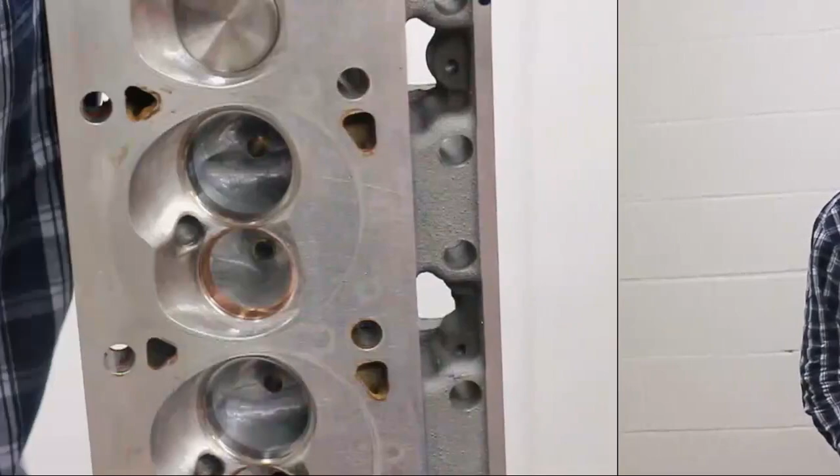The first thing that we did was put in beryllium exhaust valve seats here, right? You can probably see that they are a little different color to the normal seats. Secondly, whilst putting in the valve seats, we enlarged them to a 1.72 diameter.

The stock intake valve on these heads comes at a 194. So there was room to put in this larger valve. So instead of the normal 202/16 or 205/16, what we had was a 194 and a 172. So you can see we've sacrificed some intake valve size for exhaust valve size.

Here's how the intake and exhaust valves look when installed. As you can see, it doesn't look that much different to stock. It's not until you put a virtually stock-sized valve head up against it that you can see the difference.

By the way, this is a Dart casting here, and you'll be happy to know that this particular Ford Dart casting works very well. It has gone through life in two forms. Firstly, it was used just to test, some tests I did for Dart, and showed up very well.

And then we used this head to develop a supercharger head for somebody who unfortunately has passed on. So it's surplus to requirements right now. So we'll have these heads for sale after we've done this video.

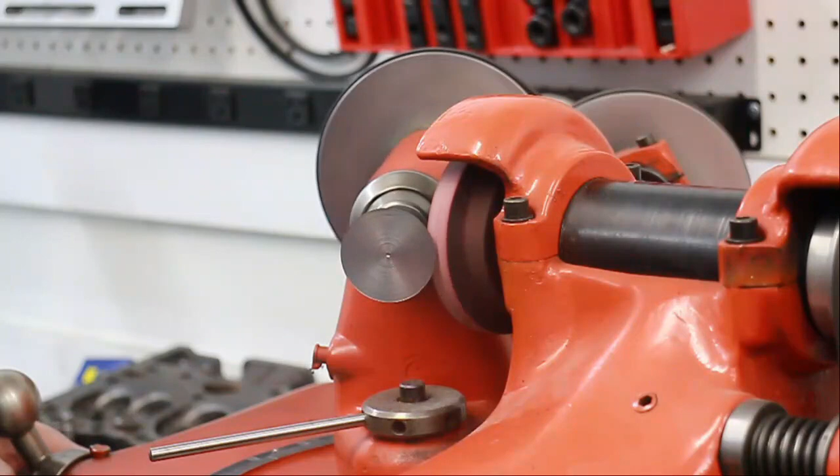Probably the best first step here is to grind an exhaust valve seat protector with the same underhead form as is going to be used. I've just back cut this and the seat to suit. Take a look at this face here—you'll note it's been faced off so there's no margin, and the OD of the valve is just a few thousandths less than the seat. This is critical for us to be able to get in with the grinder or cutter and form the edge that comes out.

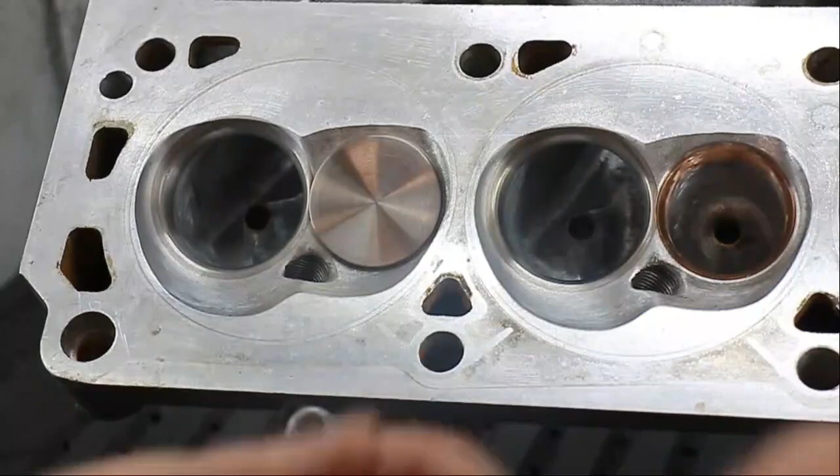We're going to do an area test, let's see how this all turns out. Let's set that there so that's the amount of area between the seats where there's no shrouding. Right, that won't go in there, nor will it come out—so the valve is shrouded. We need to fix that by cutting the chamber away so that when this valve is lifted by that much between the seats, there is a consistent area right through there.

So that's what we'll do next. By the way, I usually start off with a smaller ball here to get the best form around the side of the valve where it's shrouded. We can afford to undercut this a bit here to give us a little extra in terms of flow in the critical region. I call this area ruling the exhaust seat and valve.

That's not a name I've thought up—I've borrowed it from the aircraft industry. So that's what we'll do for our first move, is area rule the seat area.

A point here I didn't mention was the extent with which we need to use that flow ball technique on the exhaust. For what we're doing, typically the flow is supersonic up to around 200 lift on your typical V8, maybe a little more, but if we accommodate the first 200 thousandths, we are definitely in the ballpark. Now it's going to be noisy doing some of these tasks, so I'll start with our baseline, but then it's going to be all downdraft, vacuum cleaner, suction noise, etc. So look for the text posted on top of the video.

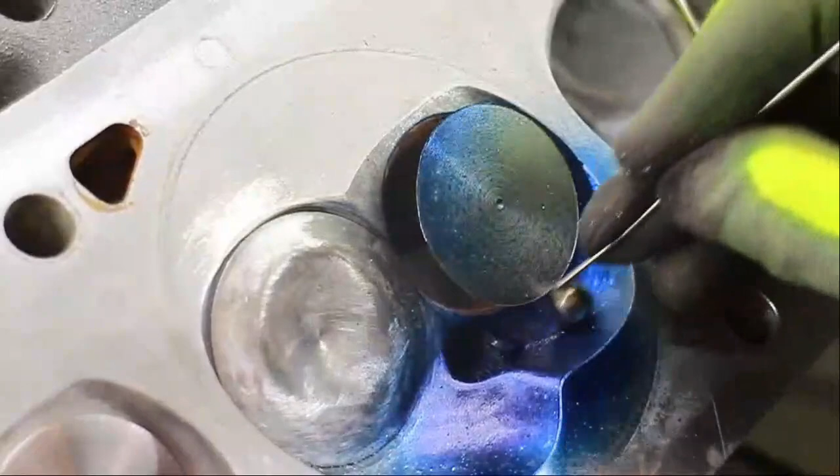We're going to use the same technique with this ball, other than the fact that rather than try and pull it out from under here, we're going to try and push it in. And what we do with that is we make a line in the blue like this. The reason we're going to do that is it's very easy to take too much off down here, so that's why we tackle it from this side.

So our first move is to grind along here, and I blued it up so that you can see what will be left from the original cut.

In this shot here, you can see the blue area here, which is what I left from using the small ball to clearance under there. The big ball resulted in a shape like this, and to note, we tackled it from the other side. You'll see that that goes in just over halfway. That's where we want to be.

Now the next job is to blend all this out with an emery disc. So that's what we'll do next.

The intake we do in a similar fashion to the exhaust, but there are a few differences. What you see here are 3 flow balls: the small one is a quarter, 5/16, and 3/8. Now, the seat conditions for this are different to normal.

The flow does not really go supersonic, although it approaches it. So what we're going to do is clear the shrouding completely, or at least as far as we can, with the quarter inch ball.

Then we're going to use the 3/8 ball to lift the valve and clear it with the quarter one. This should leave us a chamber which has about an 80% factor of deshrouding, which for an intake is about where we want it. The reason for that is that the intake is more flow coefficient sensitive, not area, and having the walls closer but not too close can cause the flow to cling to them. So that's what we're going to do.

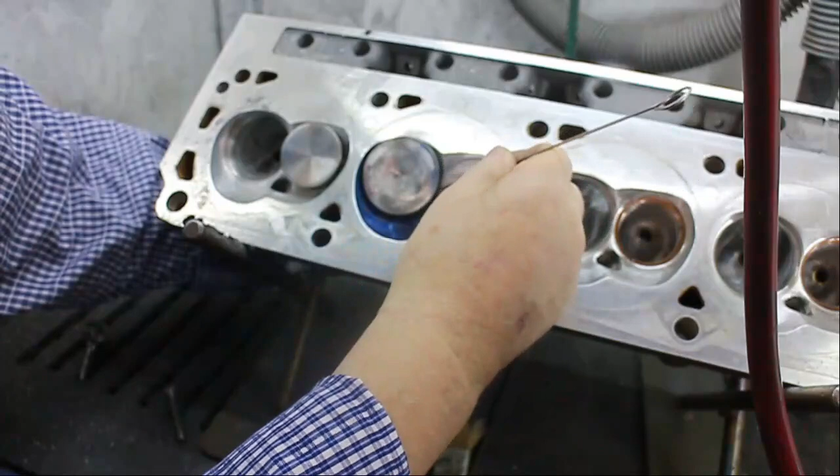Once we've set the height of the valve with the ball, it's a question of marking the chamber. In this shot, you can see the line in the chamber where the ball contacts both the edge of the valve and the chamber wall. This is where we have to cut up to.

Here you see the chamber cut to the line, and so from here we can move on to our next step.

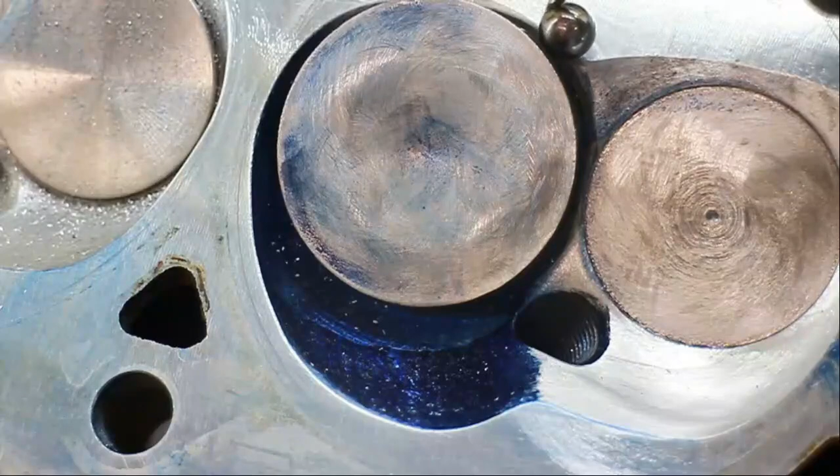The next move is to raise the valve to a slightly higher level than the ball we're going to use. You'll see here I've raised the valve with a half inch ball, and I'm pulling through about a 3/8 ball. So that's all clear.

So now we can move on to our next phase, which is to make sure we get the area right adjacent to the spark plug.

Here is what we see after reforming for the 5/16 ball. Now, it's not quite just a 5/16 ball clearance here. This area is, but as it gets over here, it starts to form a trough. The air does not come in like this, it comes in at an angle. That does 2 things: it increases the flow, and it increases the swirl.

Our next move, as far as the chambers are concerned, is to round this edge here, just this one. That's to let the gases come back into the quench area as the piston goes down. But also it's to soften the quench action going that way, as the swirl is this way, so we don't want to counteract it too much.

Also, I should point out that with these chambers you need to run a tight quench clearance, something in the order of 28 to 30 thousandths. Make sure you've got everything right for that, because 28 is getting close to the point where they will hit.

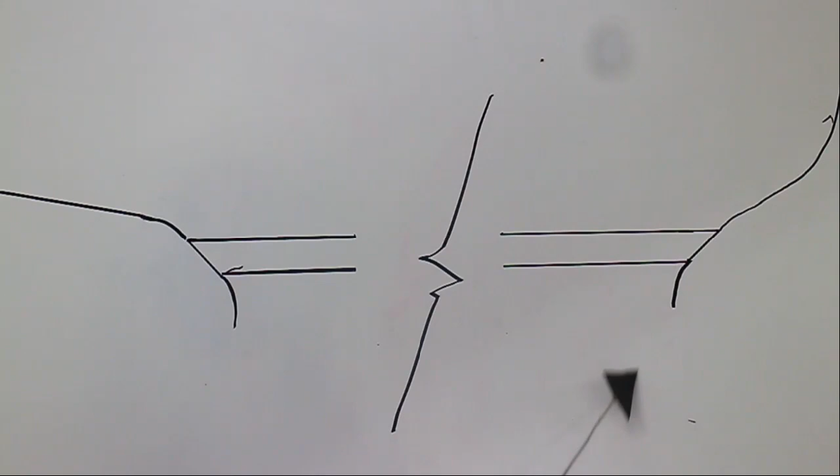Also note here we've done the bowl clearance here, but as it comes up here it's less and less. So we don't want air or gases coming round this corner here, not being able to make it round here and shutting off this side of the port.

Again, an orientation, roof of the port, floor. Don't remove any metal that you can avoid doing on the floor. When this actually matches up to a gasket, we'll put the number across the top of the screen. This is one of those few occasions when a gasket match actually is beneficial.

So we match the gasket up here. We widen the port here, consistent with not breaking into the pushrod hole. We don't take any more metal off here than we have to, other than to blend it.

This corner here is a high flow corner. You need to move the floor up a bit so that it at least goes straight in, and make this a nice blending radius in this turn here. And there will be a bowl in this area here.

Now hopefully you can see that with the screwdriver just in there. This area here is a bowl. So the flow comes out at an angle like that. Now if you look very carefully, you can just see the exit vane there. There we go, it's at that angle there.

Right, now again, we're not trying to make the port big. This is a 169cc port. So you can see that not much has come off.

Here's a cross section through the exhaust port. Now what I want to show here is this dotted line, that's more like the exhaust port after the seat's been cut from the bigger insert that goes there. What we're looking for is almost no radius off this tight turn here. All that area ruling you did produced a radius here - just take that radius off and have a tiny little corner break just there.

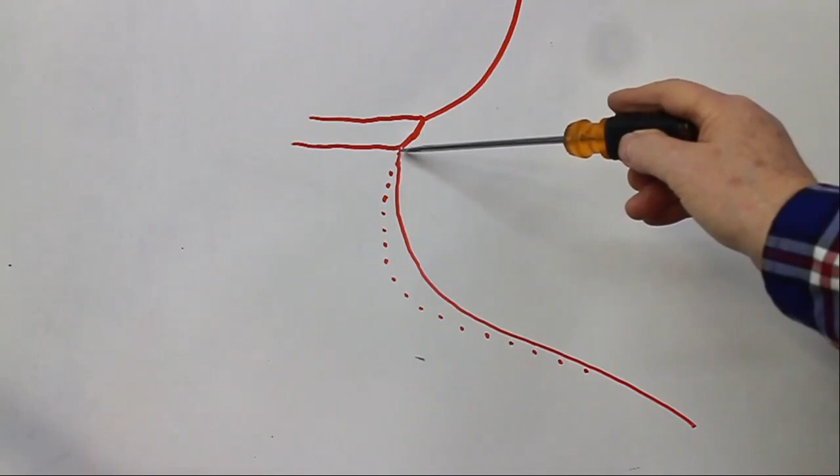And this only goes on the short side turn of the valve, and only about a third of it at that. After you've done that, you need to have the tightest part of the radius on the floor close to the seat and have it get bigger and bigger as it goes down. That will get you the best flow and the least reversion.

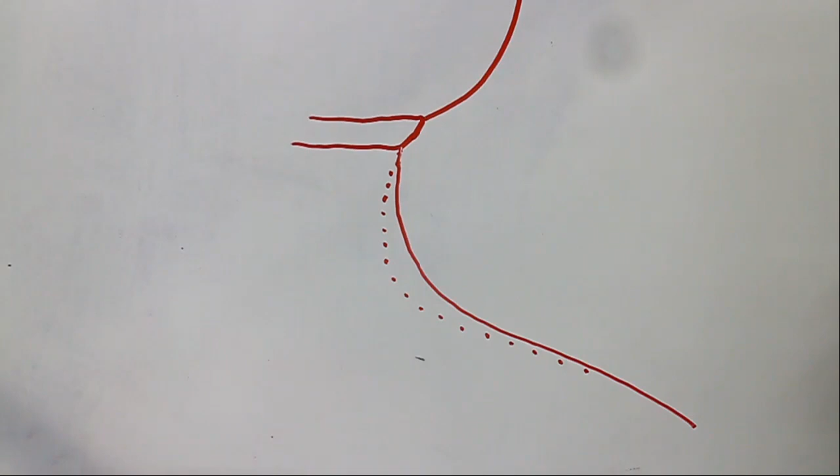Okay, let's orientate ourselves here. Roof of the port, floor. There's a lot of flow up here, so a generous radius here, and move the port up as far as possible within the constraints allowed by the gasket. Do not take any more off the bottom than you have to.

This is the cylinder wall side of the port, so the flow is going out at an angle like this. So we need to make sure, as I've said before, that we bowl this out here, so that the flow goes out and will actually come across. So this is a high flow corner here, so make sure that this is as wide as possible across there.

Apart from that, the guide boss, well, you can see the shape of that - a nice half inch, three-quarter inch, or a worn out three-quarter inch emery roll will form that deal there. Right, that should do it for our port description here.

Okay, it's flow bench time. I have our test head set up here on the flow bench, and our IOP program to analyze the test results is all set, ready to go on the computer.

Well, that's our flow testing over with. Let's take a look at the results. So what have we achieved here? Let's look at this chart here, and what it shows is the available extra through flow area in the supersonic phase of the flow at low lift.

So that we had a good comparison, I made sure that the 1.6 valve port was from a good cylinder head. It was from a Cup Car SB2 head that had been ported by a Cup Car guy. It wasn't an area ruled head, but it was a very high flowing cylinder head.

Peak flow was about 243 CFM, I think, at about 850 lift. We're lifting our test valve here only to about 700 lift, so we're only going to compare the first 250. Our port flows around about 215 at 700, compared with the Cup Car's port at about 235 at 700. Right, so that's the difference. It's all up at the top end.

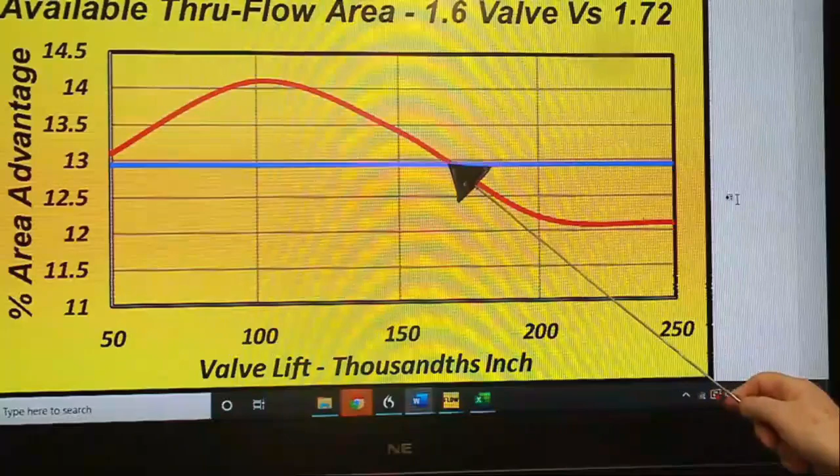Anyway, let's get down to it. Here's the area advantage that we have doing the port with an area ruled port with a 1.7 valve. This is our average gain. So you can see for about a 13% increase in valve area, we've actually managed to get about a 14.25% increase in flow. It drops off here because the 1.7 valve gets shrouded quicker than the 1.6, so it drops off here, and ultimately we get about 12.2% improvement in flow up to probably about 400 lift.

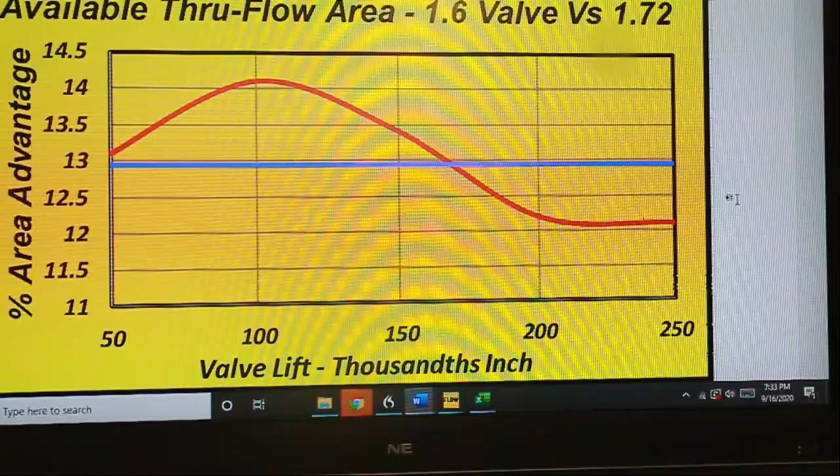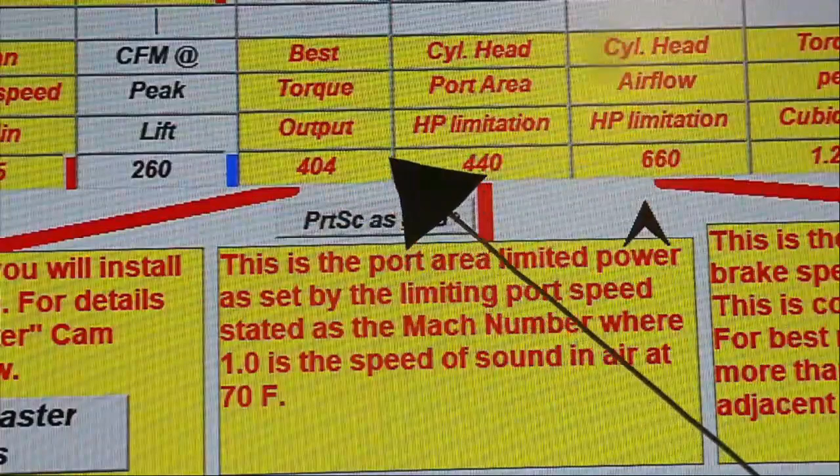Just before we get into our flow test chart, I want to show you the opening screen and the final screen. For the 302 or 306 engine I was talking about, the program predicted 404 foot-pounds of torque and 440 horsepower as the limitation. In effect, we made like 398 and 431, so it's fairly close there.

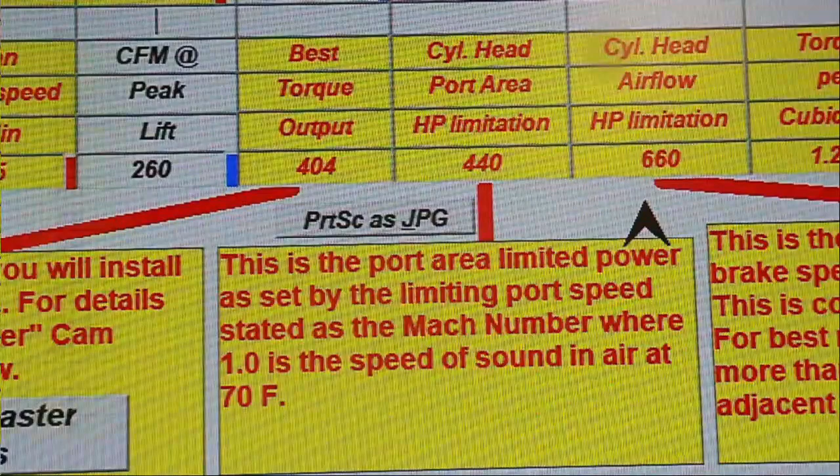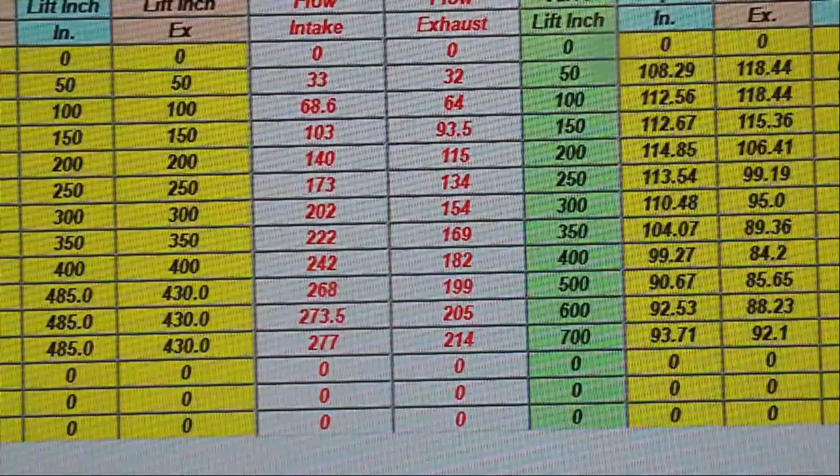But anyway, now let's go look at one of these flow test screens. So, observed intake flow, observed exhaust flow - they're already put in, and apart from that, I've pushed the calculate button, which is down here just off screen, and what it does is calculate the final CFM over there, plus the SA discharge coefficient, plus the intake and exhaust ratio, plus the port velocity, which is way over here.

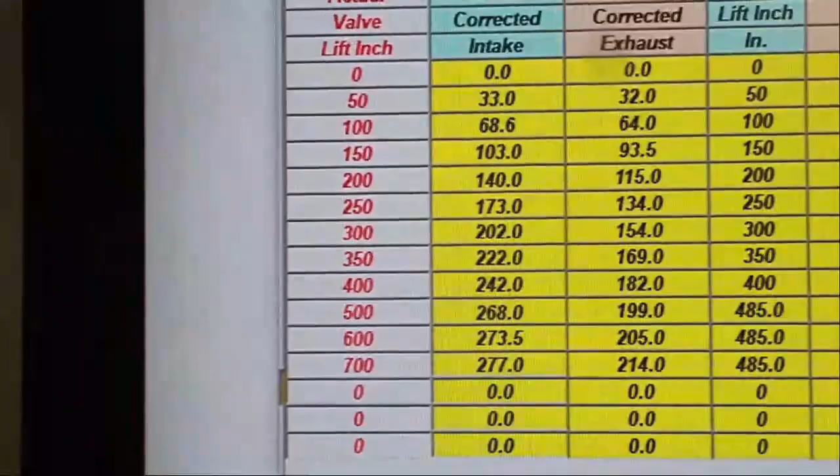The corrected numbers - as it happens, they're correct. They were flowed at 28 inches and corrected to 28 inches, so they're identical to the observed figures. I put 277 into here at just over 700 lift, something around 750-ish. We saw a high of 287, but it's irrelevant because we're not lifting there - we're using a maximum lift of probably around 600 here.

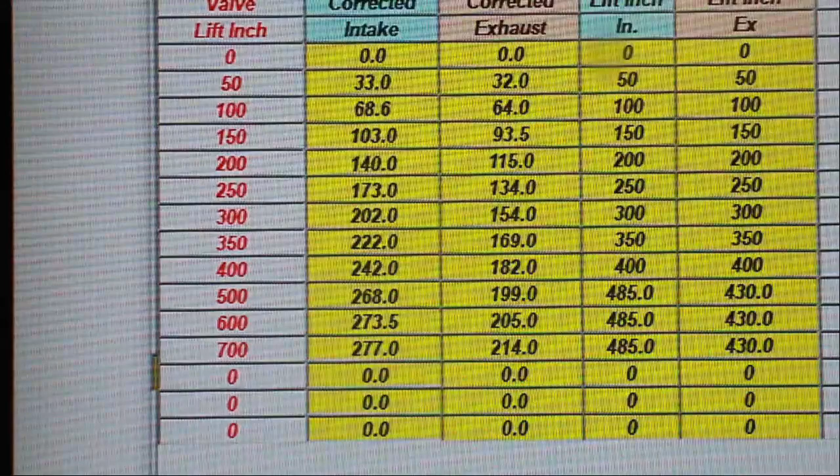Now let's look at our graphs. A lot of you probably aren't used to looking at flow curves, so telling whether it's good or bad isn't something you'll do just like that. So what I did here for a comparison is use a cylinder head of known performance - here's the lines for it, the thin lines.

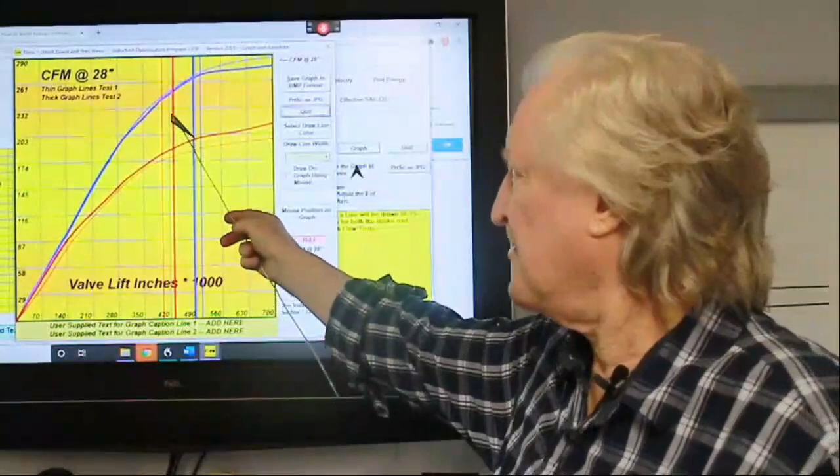This cylinder head was a Trick Flow head that had just been cleaned up. Now, I don't mention Trick Flow heads very often, and I should apologize to Trick Flow for this, but they've got some very functional cylinder heads, and the head represented by those thin lines was no exception. It just had a cleanup and was dyno tested, and on a 393 inch Ford motor, it cranked out something like 550 horsepower and about 535 foot-pounds of torque, which comes under the heading of really good. So I'm not comparing some has-been head with another. By the way, if you want to check out the mods on this Trick Flow head, I'm going to be doing a video on it, so watch out for that in the near future.

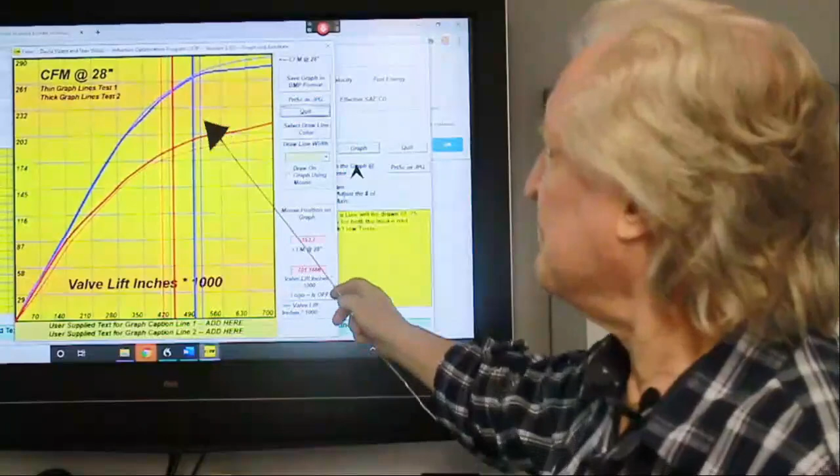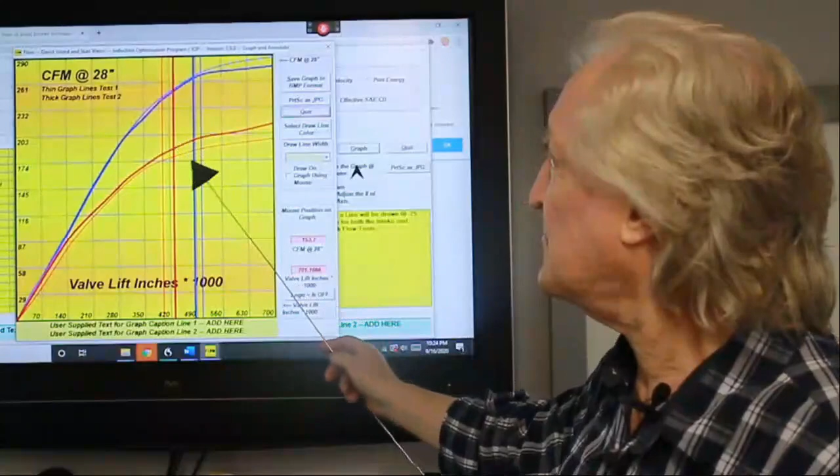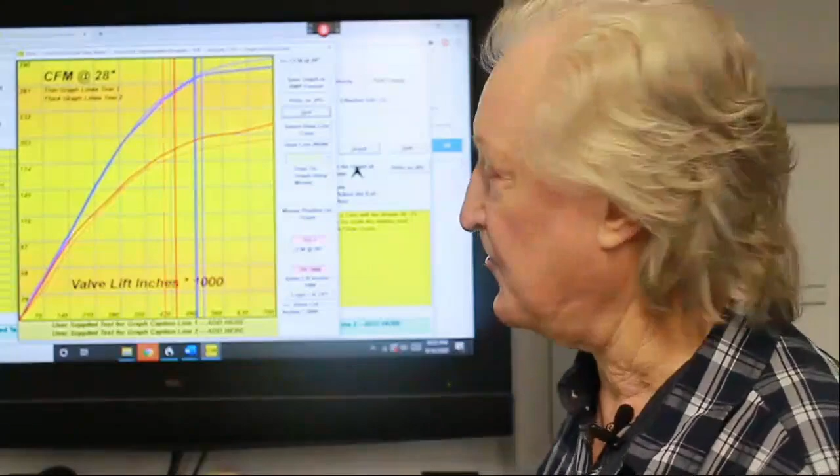Right, now let's get back to this. As you'll see, careful work with seat geometry and ports has resulted in some very good flow curves, both intake and exhaust. But it's not just flow we need to concern ourselves with - one of the most important things we have to look at is port velocity. So let's take a good quick look at that.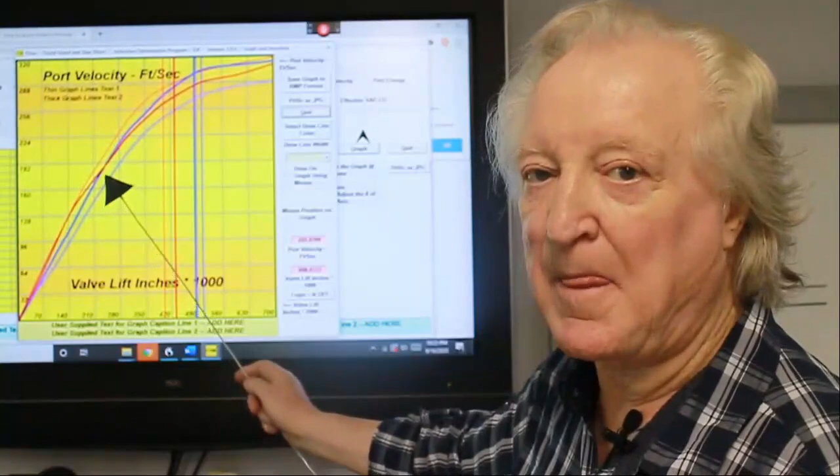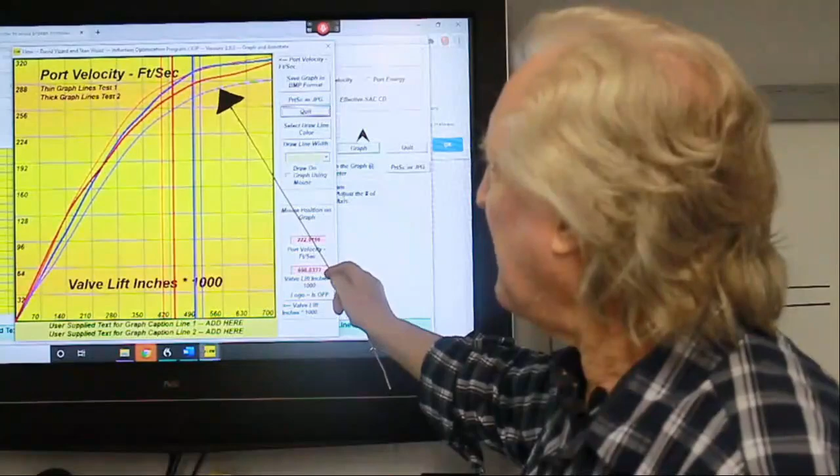I should have told you this beforehand: the magic number for port velocity is to have 300 feet per second at peak valve lift. Now, that 300 feet per second pertains to this flow bench program and isn't necessarily universal across the board, although accepted SAE calculations for mean port velocity produce very similar results. So you can see our port velocity for our supercharger heads was better than our highly functional trick flow heads - they hit almost 300 feet per second up here.

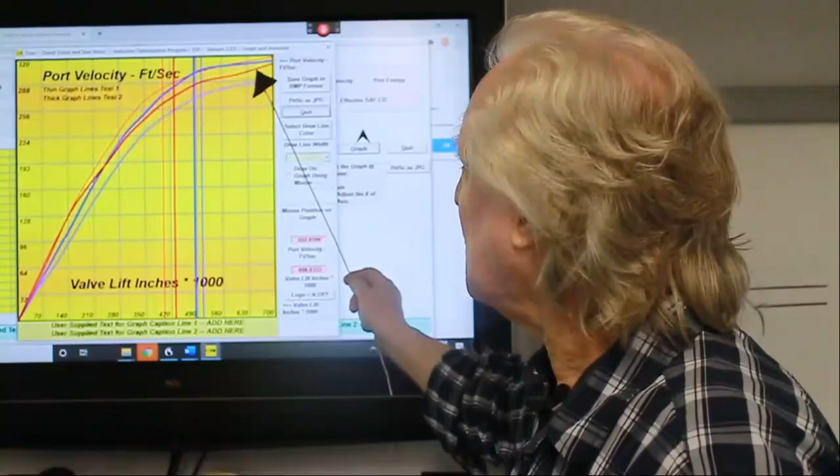Now, the exhaust - we can see that the bigger exhaust, although it flows more, the volume has gone up quite a bit, so the port velocity on this is slightly less. However, the real key to performance will be how this compares in terms of port energy. The higher the port energy, the more the gases are inclined to keep going the way they should - i.e. it has anti-reversion potential, and better ram filling potential than a port with less energy. So let's look at that.

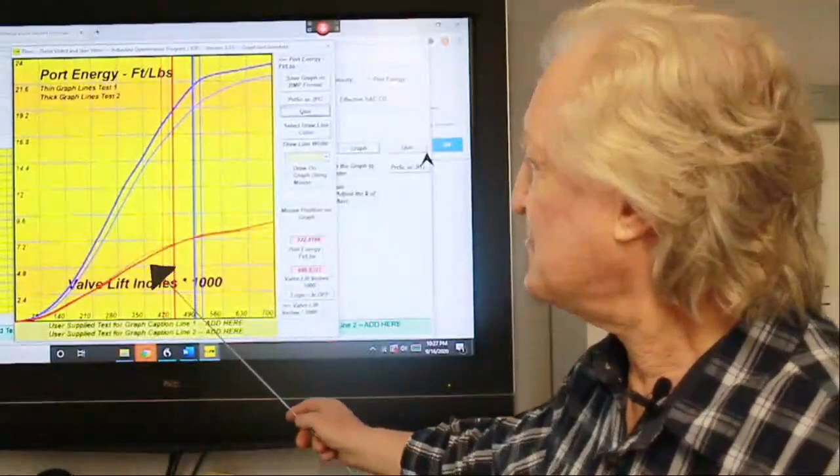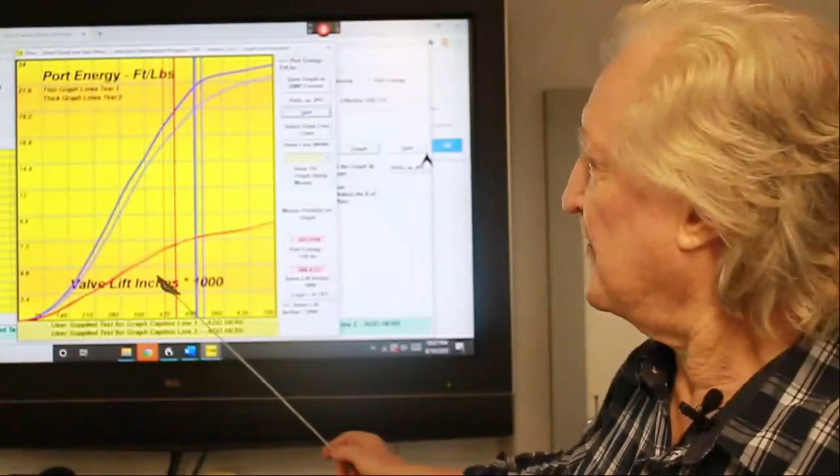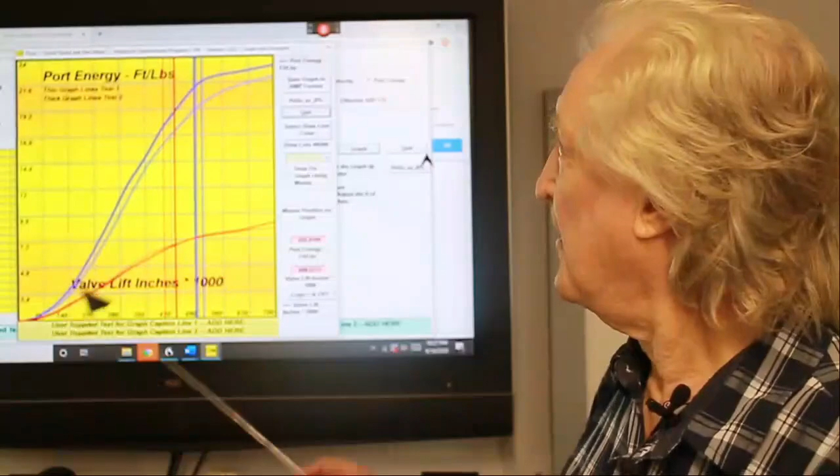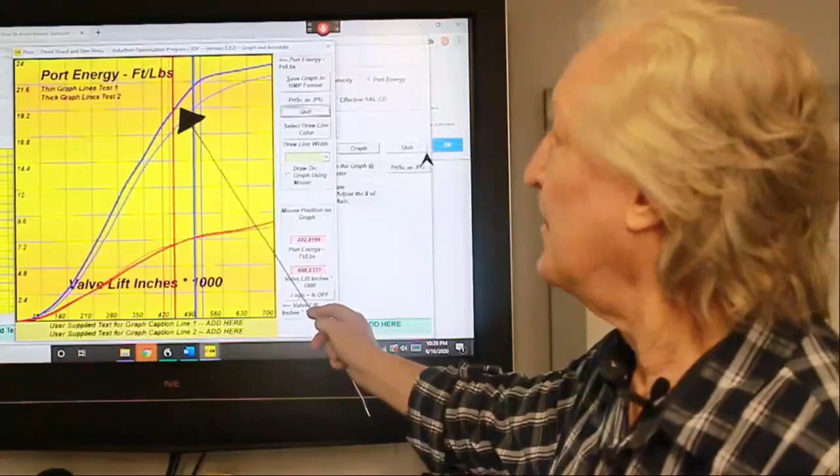Okay, here we are with the port energy for our supercharger heads. As you can see, the extra flow in the exhaust has made up for the reduced velocity - in other words, it's traded a pretty big increase in flow for a small drop in velocity, and the net result is the two ports are about the same. Remember, that thin line is for a very functional trick flow head port. On the intake, we've done very well - our port energy is quite a bit higher than a head of known high functionality.

So that sums up then: what we've got is a cylinder head with a great deal of potential.

Now you know how to modify, or you know a lot more about how to modify heads for blower and nitrous use. So exactly what can we expect from these specially modified heads - heads specifically for nitrous or blower use?

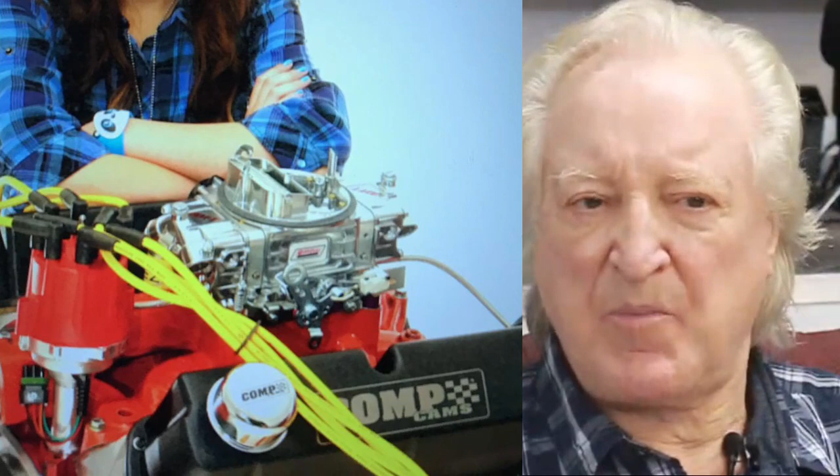On her engine, which she tested at Doug Herbert's while his shop was still open here in Charlotte, produced - I think it was 431 horsepower on the engine with about 400 foot-pounds. And this was a true street motor, 10-to-1 compression, vacuum idle advance on it, vacuum distributor and carburetor.

On pump gas, it made that 431 horsepower, and like I said, about 400 foot-pounds, and it idled at about 580 RPM, so it was not a big cammed motor. And this was intended for her Mustang - she had a Mustang. She was going to drive it on the street and drag race it occasionally until an all-out drag race car was finished. Anyway, she was only 16 at the time she built this engine, which is a few years ago now. And the power figures were...